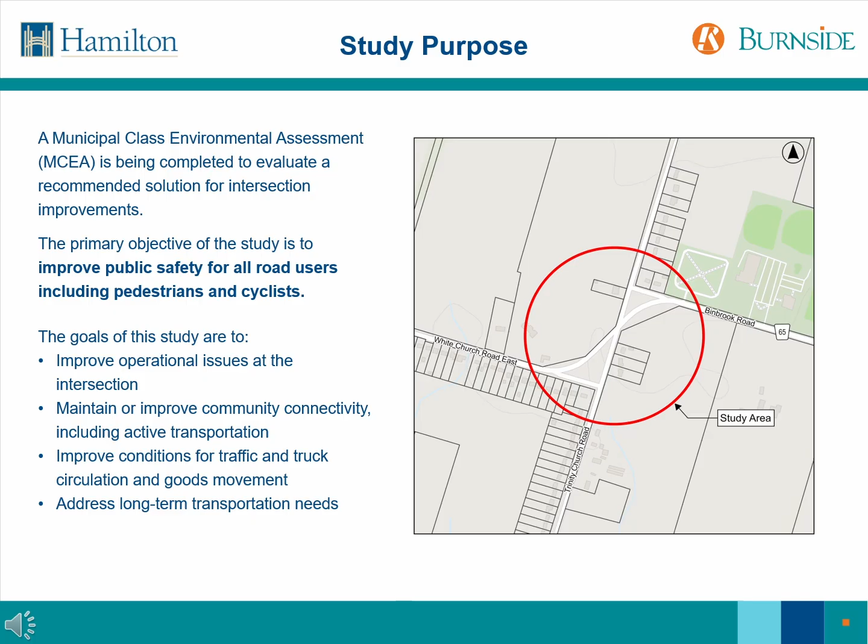The study is currently at Phase 2 of the municipal class environmental assessment process, in which alternative solutions to solve the problem opportunity statement are identified. At this stage, the natural and socioeconomic environment is also inventoried, and agencies, Indigenous nations, and the public are engaged. Also included in Phase 2 is the evaluation of the identified alternative solutions using information collected for the natural, socioeconomic, technical, and financial environments.

This Public Information Center is an opportunity to provide your feedback on the alternatives being considered for the intersection improvements and the preliminary preferred solution, as well as your perspective and concerns in the study area. Feedback received will be reviewed to confirm the preferred solution and documented in a Public Information Center 1 summary report.

In Phase 3, the alternative design concepts for the preferred solution will be identified. Phase 3 will also include a second round of consultation with agencies, Indigenous nations, and the public. This will include a second Public Information Center. In Phase 4, the final notice, called the Notice of Study Completion, will be issued to initiate the 30-day public review period of the Environmental Study Report. This document will summarize the studies and decision-making that informed the final solution.

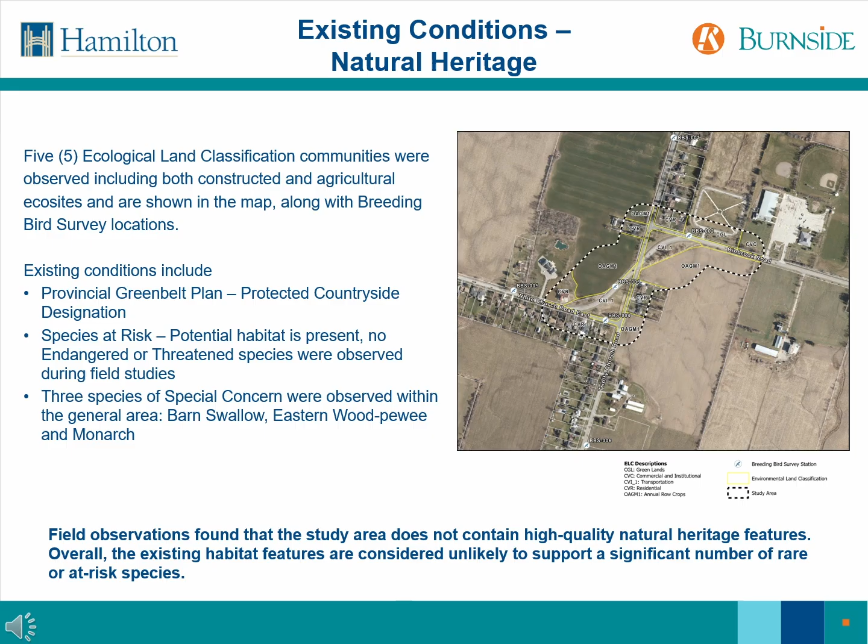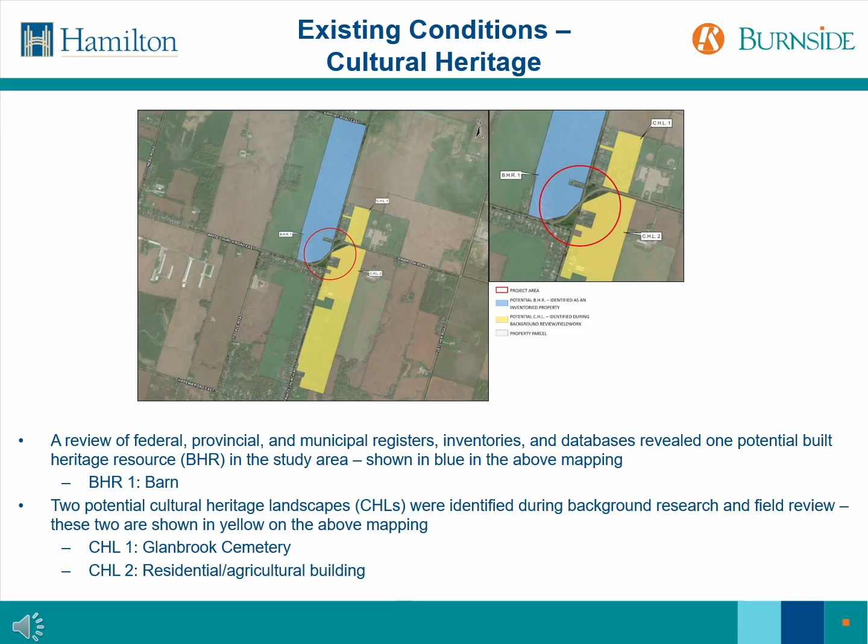A review of federal, provincial, and municipal registers, inventories, and databases revealed 1 potential built heritage resource, BHR, in the study area, shown in blue in the above mapping. BHR1, barn, shown in blue. 2 potential cultural heritage landscapes, CHLs, were identified during background research and field review. These 2 are shown in yellow. CHL 1, Glanbrook Cemetery, the first property highlighted in yellow at the north end. CHL 2, Residential Agricultural Building, second property highlighted in yellow at the south, extending far beyond the study area.

The technical environment existing conditions include transportation conditions. As part of this environmental assessment, a comprehensive transportation assessment was conducted to evaluate existing and future traffic operations, safety concerns at the intersection, and community feedback. The study aims to maintain or enhance community connectivity, including active transportation, while mitigating impacts on traffic, truck circulation, and goods movement.

Burnside's traffic analysis reviewed collisions in the study area and found that of the 25 collisions that occurred between 2019 and 2023, none of the collisions involved a pedestrian or cyclist. Single motor vehicle collisions were the most common, with 7 occurrences. There were 6 rear-end collisions and 6 angle collisions. Approaching, sideswipe, and turning movement had 2, 1, and 3 occurrences, respectively.

Municipal policy was also reviewed for existing designations, showing that White Church Road and Binbrook Road are identified as future truck routes according to the Truck Route Master Plan. The Cycling Master Plan also recommended future reconstructions of the Binbrook Road, White Church Road corridor to include on-road cycling facilities.

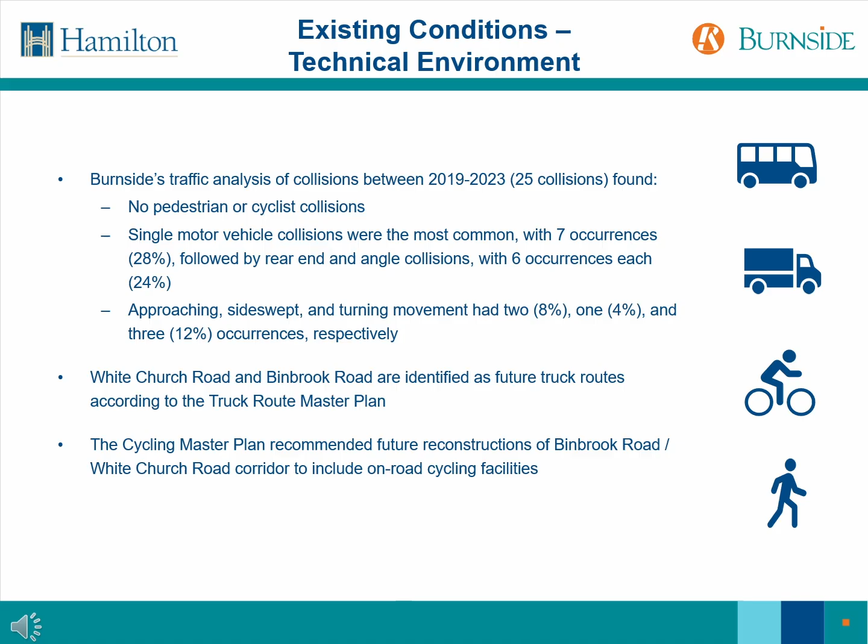There are currently no dedicated pedestrian sidewalks or bicycle facilities on Trinity Church Road or its side roads. The roadway features unpaved and partially paved shoulders. This is reflected in the poor level of service for bicycles and pedestrians. As shown on the previous slide, the city's cycling master plan recommends that any future reconstructions of the Binbrook Road and White Church Road corridor should include on-road cycling facilities.

Overall, traffic operations are anticipated to remain at an acceptable level of service for vehicles by 2031. This is reflected in the good level of service for automobiles. South of this intersection, Trinity Church Road passes through farmland with silos, which likely contributes to truck activity in the area. The level of service for trucks is noted to be fair to good. As mentioned on the previous slide, White Church Road and Binbrook Road are identified as future truck routes according to the city's Truck Route Master Plan.

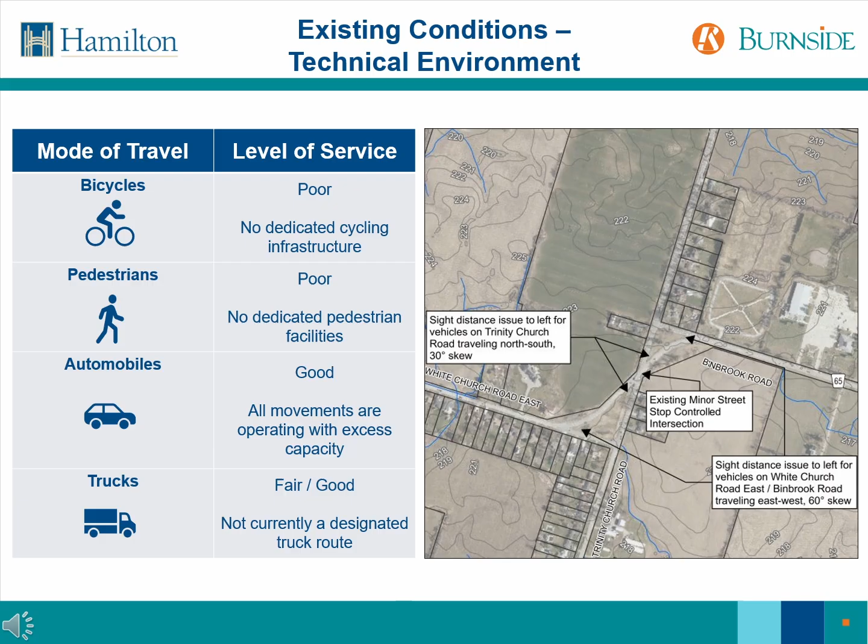The map prepared as part of the draft archaeological assessment shows areas of archaeological potential in orange and green, which have previously not been disturbed. If the preferred alternative confirmed for this project is expected to disturb the areas with archaeological potential, then additional archaeological work will be required for these areas. This map also shows areas with low archaeological potential in yellow. These are areas where the lands have been disturbed in the past and would not require additional study. The cemetery is shown in purple at the north end of the study area.

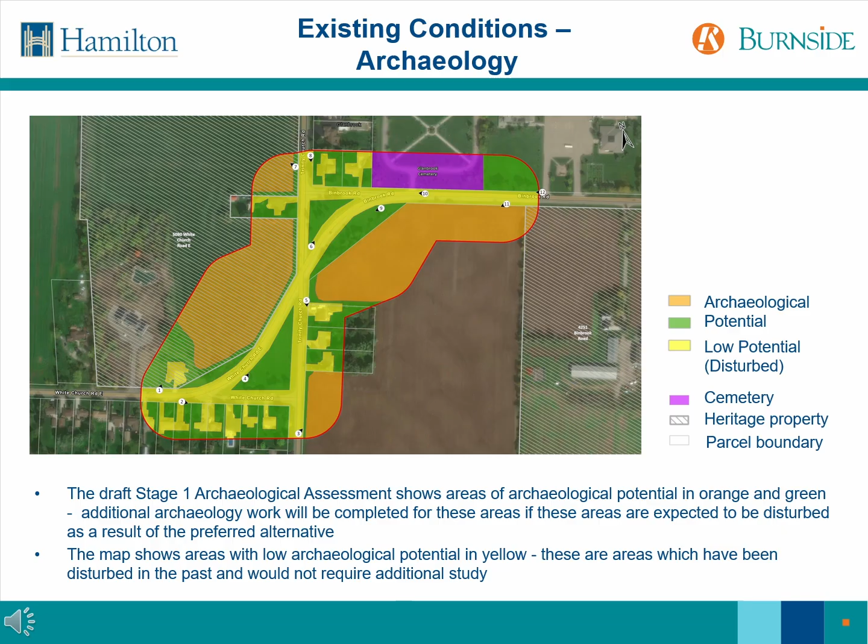The first alternative is do nothing, a mandatory requirement for consideration in the municipal class environmental assessment process. Under this alternative, the road corridor and intersections would remain the same, with continued performance of regular maintenance as required. As this alternative does not address the problem opportunity statement, it is not carried forward. As we noted earlier in the presentation, the primary objective of the study is to improve the safety of the intersection for all those who travel along the road, including pedestrians and cyclists. The do-nothing alternative does not meet the goals of this study, which are to improve operational issues at the intersection, maintain or improve community connectivity, and mitigate impacts to traffic and truck circulation and goods movement to address long-term transportation needs.

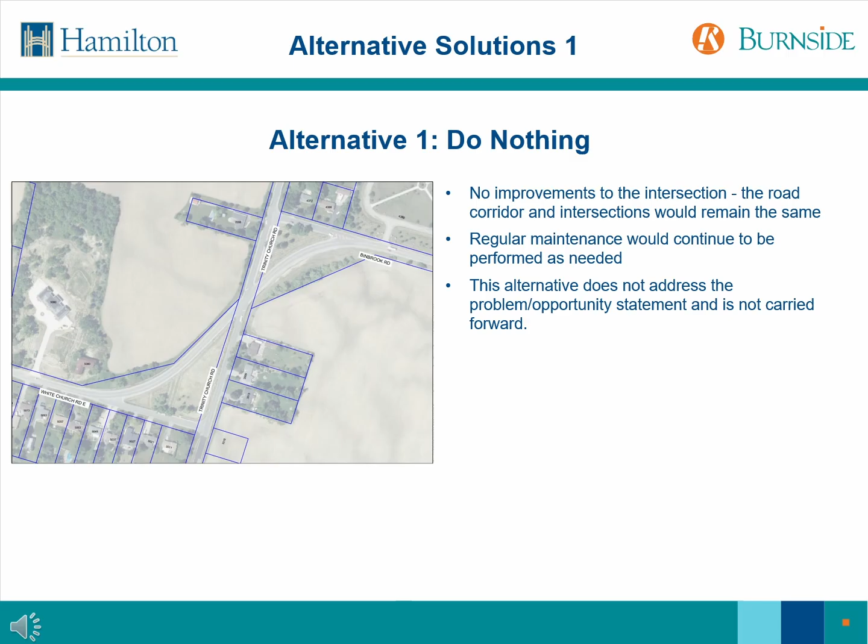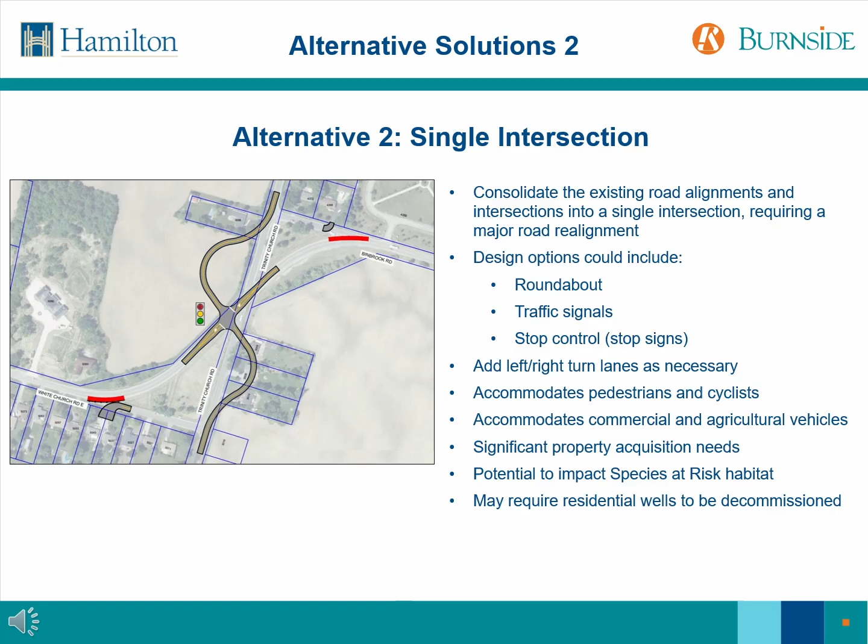The second alternative is a single intersection. This alternative would include consolidation of the existing road alignments and intersections into a single intersection. Design options that would be considered under this alternative would include a roundabout, signalization, and stop control. This alternative would also include the addition of turn lanes as necessary and accommodate active transportation users such as pedestrians and cyclists. The Cycling Master Plan recommended that future reconstructions of the Binbrook Road, White Church Road corridor include the installation of paved shoulders. The Recreational Trails Master Plan also recommends assessing the Binbrook Road, White Church Road corridor for options to include on-road cycling facilities. This alternative would also accommodate commercial and agricultural vehicles.

Alternative 3 is two intersections. This alternative would include consolidation of the existing road alignments and intersections into two intersections along Trinity Church Road at White Church Road East and the second at Binbrook Road. Design options that would be considered under this alternative would include a roundabout, signalization, and stop control, similar to Alternative 2. This alternative would include the addition of turn lanes as necessary and accommodations for active transportation users such as pedestrians and cyclists. The Cycling Master Plan recommended that future reconstructions of the Binbrook Road, White Church Road corridor include the installation of paved shoulders. The Recreational Trails Master Plan also recommends assessing the Binbrook Road, White Church Road corridor for options to include on-road cycling facilities. This alternative would also accommodate commercial and agricultural vehicles.

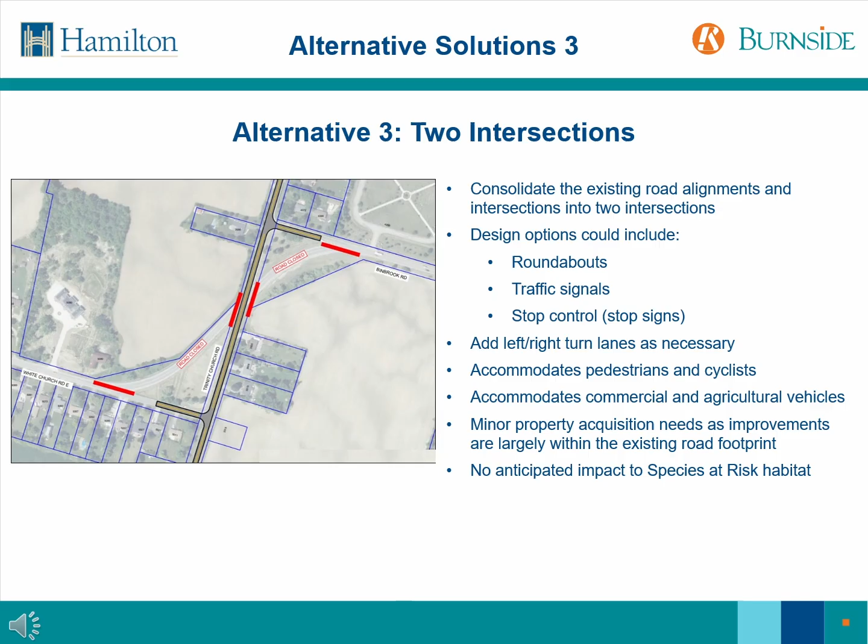The impacts of the alternative solutions are evaluated against the inventory of the natural, socio-cultural, financial, and technical environment of the study area, including possible mitigating measures. A summary of the criteria is provided under each environment category. The natural environment criteria will be evaluated based on the potential impact of the alternatives on natural resources within the study area. This includes impacts to groundwater resources and drainage in addition to areas such as bird, insect, and other wildlife habitats. The areas of impact will be evaluated based on anticipated construction activities and limits of disturbance of each alternative. The extent of impacts and the ability to mitigate such impacts or provide enhancements to the natural environment will help determine the evaluation of the alternative.

The sociocultural environment criteria includes consideration for potential to impact heritage resources such as archaeology and cultural heritage. Nuisance impacts such as noise, visual impact, and construction impacts are also considered along with the impact to driveway access and land and property acquisition needs. These criteria also include how well the alternatives conform to municipal and agency policy. The technical environment criteria will consider aspects such as how the transportation network is affected through levels of service and traffic congestion, as well as operational and roadside safety. This also considers design constraints looking to the future project stages, utility impacts, and goods movement requirements.

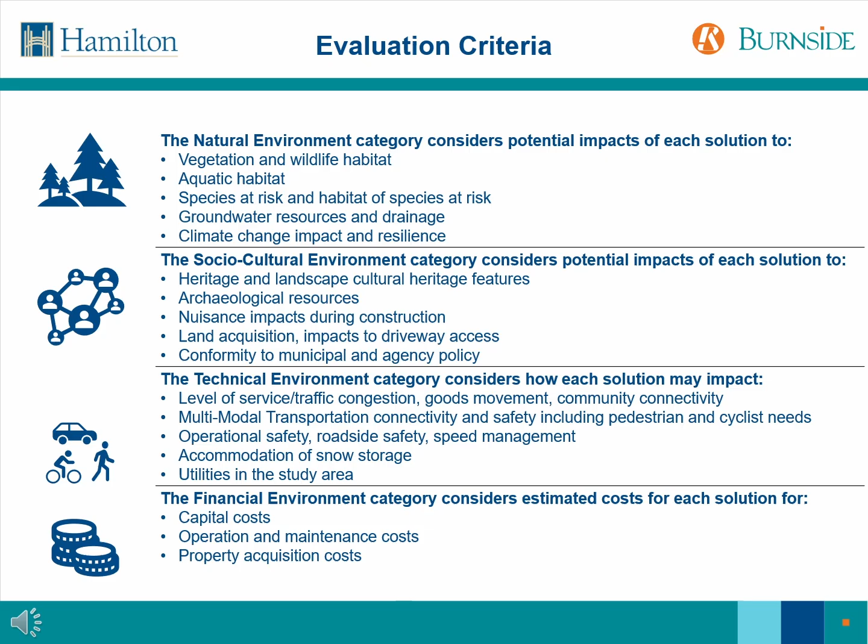Transportation-related considerations such as level of service for local residents and businesses, multimodal transportation connectivity and safety, and pedestrian and cyclist needs are also considered. The financial environment criteria will be evaluated based on a comparison of estimated capital costs, estimated operation and maintenance costs, and anticipated property acquisition costs for each alternative.

Between the three alternatives, alternative 3, 2 intersections, was found to be the most preferred overall and is therefore the preliminary preferred solution. We are presenting the solution at this PIC to see what residents think about this, and we'll use your comments as input as part of finalizing the preferred solution before moving to the next phase, which will involve design concepts based on this solution.

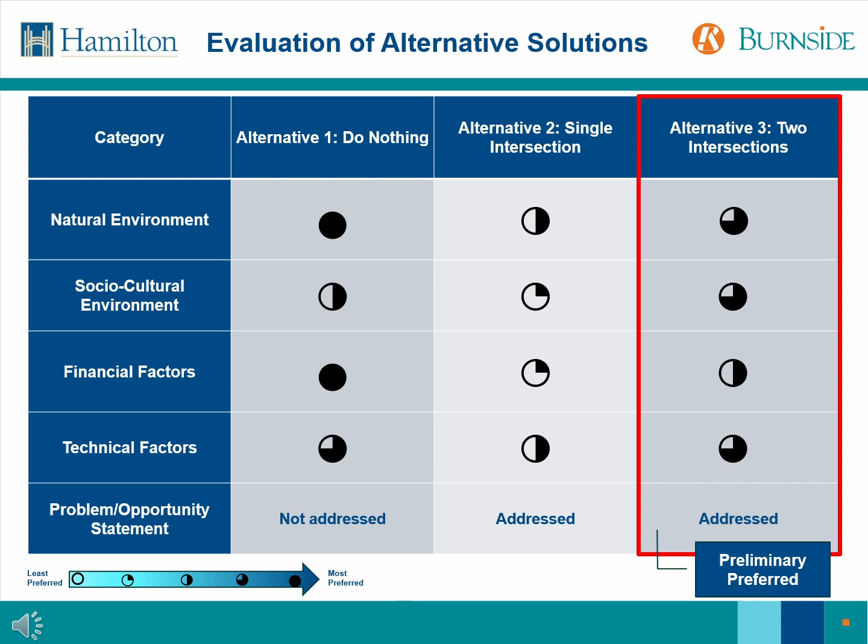Based on the evaluation of alternative solutions, the preliminary preferred alternative is alternative 3, 2 intersections. Under the natural environment criteria, it was found that this option has the least impact on the natural environment, with no impacts to residential wells and minimal impacts to drainage. Within the socio-cultural environment criteria, this alternative is not anticipated to impact cultural heritage features in the study area.

For the technical environment criteria, it was found primarily that this alternative would require the least design effort and associated design impacts. Under the financial environment criteria, this alternative was found to have the lower property acquisition costs, as the footprint of the existing road would mostly be maintained.

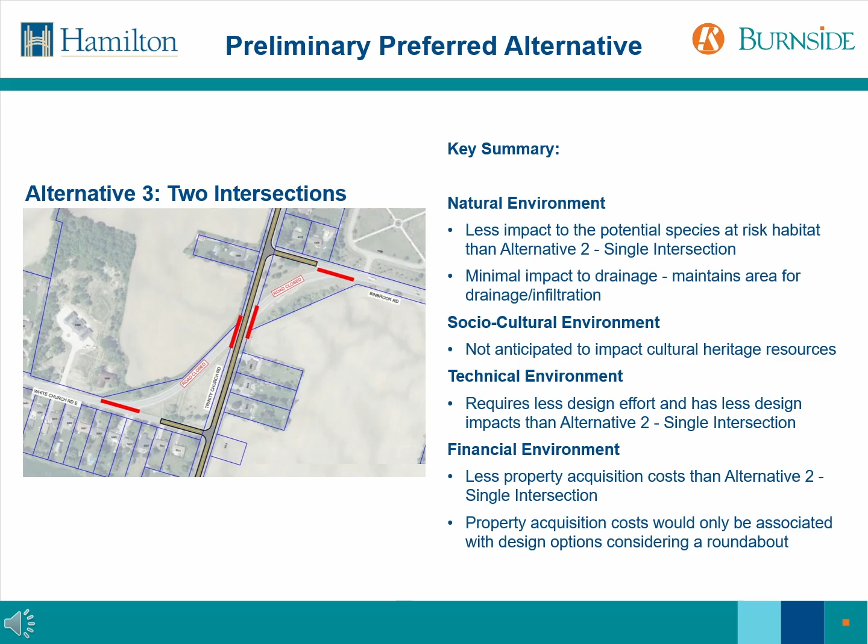Now that we've provided you with the background information and preliminary preferred alternative solution, you may be wondering about the timelines and next steps for this study. Public consultation is a very important aspect of this study. As part of this first Public Information Center, we would like to hear from the community to aid our team in furthering our understanding of priorities of residents such as yourself and what you would like to see addressed as part of this study. So, we ask that, at the end of this presentation, you provide the project team with your comments related to any specific interests or comments that you have for the team to consider, or any other comments you feel should be considered.

During the 2-week comment period following Public Information Center 1, the team will be reviewing and considering comments to determine if there's any additional information to consider in the confirmation of the preferred alternative solution. In the spring and summer of 2026, the team will continue to complete field studies and gather information to feed into the study. Public Information Center 2 will also be held in summer 2026. Keep an eye on the project webpage and newspaper for the date. If you're interested in joining the email contact list to directly receive project notices, please contact the project team.

After the completion of the environmental assessment, the environmental study report will be finalized. This report documents the work completed and will be posted for a 30-day public review period. This review period will be initiated through the Notice of Study Completion.

Thank you for listening to this presentation of the Public Information Center 1 materials. As we mentioned, public consultation is a very important part of this study. During the 2-week comment period following Public Information Center 1, our team will be reviewing and considering comments to determine if there is a need to reevaluate or confirm the preferred alternative.